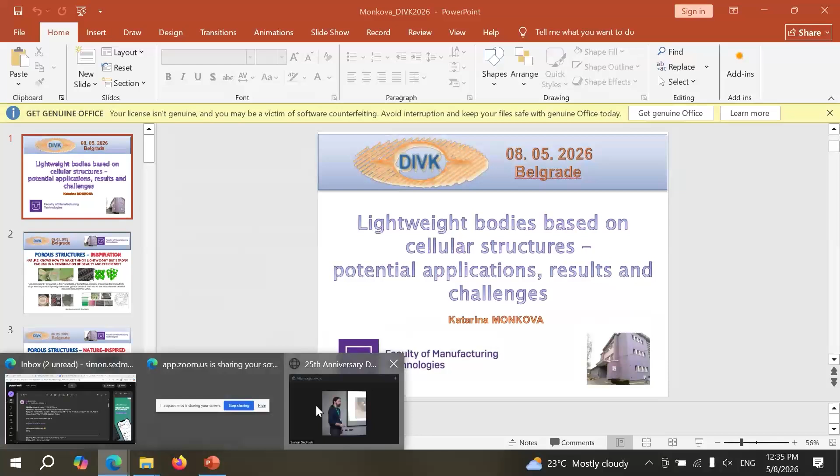Thank you very much. During the preparation, I would like to thank Professor Sedmak for his invitation, which I accepted really with great pleasure, because after a few months I can be here again. Pleasure is ours, yes, and to meet friends and present our results.

To be honest, when we spoke about the topic of presentation, I didn't know about previous presentations given by colleagues from Debrecen, so this is a little bit similar. Let me introduce our long time faculty results and research, what we are doing and now offering, cooperation not only with Belgrade, but maybe also with Hungarian people. Thank you very much, Simon.

Let me introduce myself a little bit. I am from Slovakia, from the Technical University of Košice, but one of the faculties of Technical University is in Prešov. It's situated in Prešov. They are really close cities, about 30 kilometers today by highway, so it's no problem to get there. Košice is the second biggest city in Slovakia, and Prešov is the third biggest city in Slovakia.

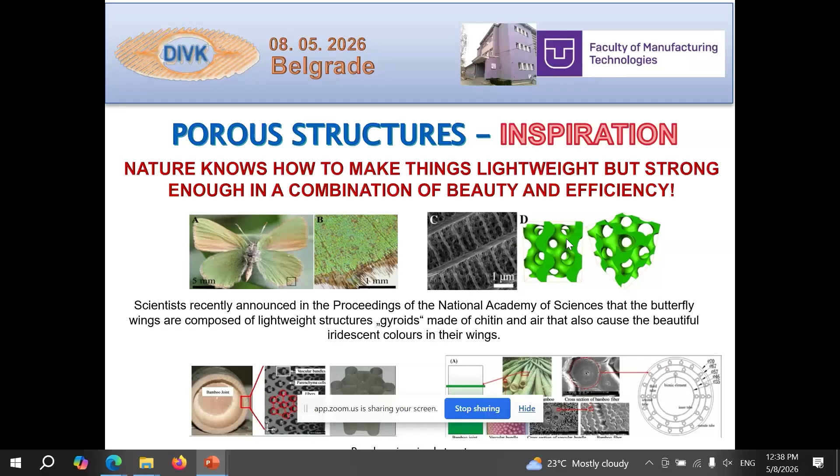We can see the beauty of nature around us. When we stay there, it's really beautiful to be there. But if you look at it like scientists or technicians, you could see how efficient nature is. Nothing is totally solid. Even our bodies, plants, animals have cellular structures that are really efficiently built to help not only with beauty, light reflection, or sound absorption, but also with mechanical properties, so efficient. So this is inspiration that came many, many years ago to us.

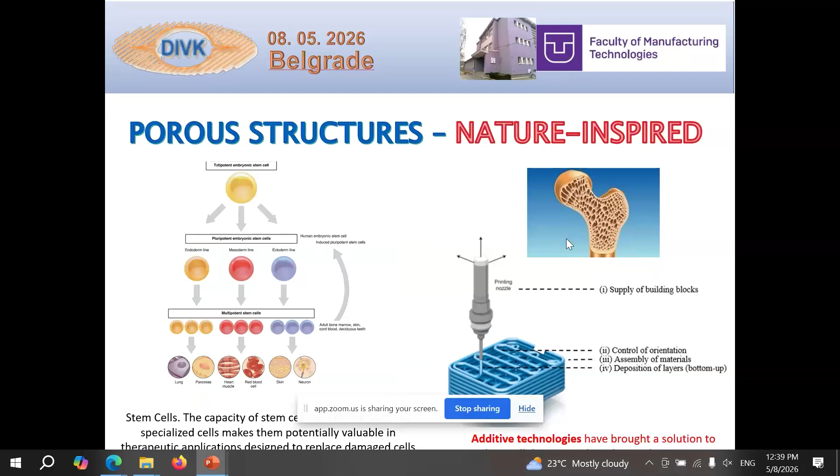And of course, additive manufacturing enabled these possibilities, because complex structures couldn't be produced very easily by conventional technologies. So this inspiration from nature could become reality thanks to additive manufacturing. Of course, these cellular structures are everywhere, as I mentioned, in our bodies, and additive technologies, as already mentioned, could be implemented also in hip prostheses and so on.

Some implants not only for teeth, but for other properties that could be much better treated after some injuries and so on. So additive technologies can help humans in this way from the healthcare point of view.

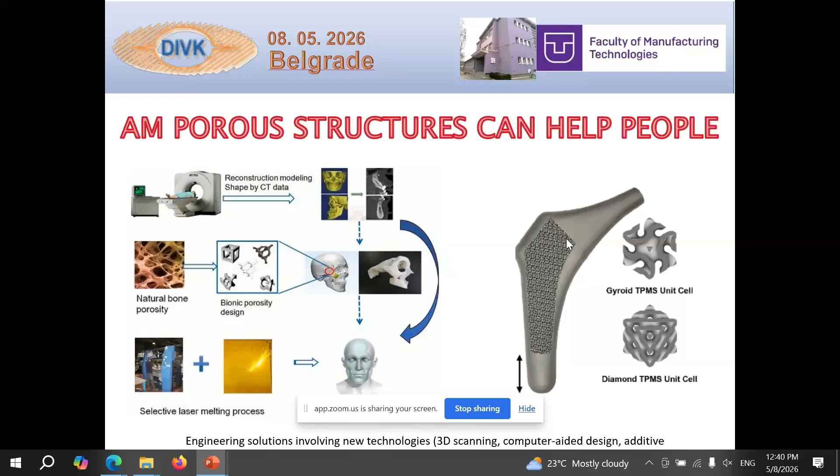Of course, if we have some lightweight structures, it can help. It can be implemented in many devices that are very heavy, for example for older people. So we can make them lighter to be more movable for older people who are not as strong as young people, and so on.

And if we look from a technical point of view, lightweighting can be very useful not only for the automotive industry, but also aerospace and aircraft industry, because some studies found out that 1 kilogram of saving on a 73-ton aircraft can save about, I don't know, 17,000 dollars per year. Fifty kilograms, for example, for long trip air flights can be even up to 1 million euros. That's one plane.

How many planes do you have around? And this saving can help in a secondary way too, because it's not only saving material, it's saving fuel, and saving fuel means that we can save our environment, reduce pollution, and so on.

Using this lightweight approach, we started to use plastic because of its light properties. My mom used to carry heavy milk or glass bottles daily, 2 liters of milk by hand, and so on. After that, we used plastic bottles, not as heavy as glass ones, and we started using plastic in huge amounts everywhere. So what should we do with this plastic now?

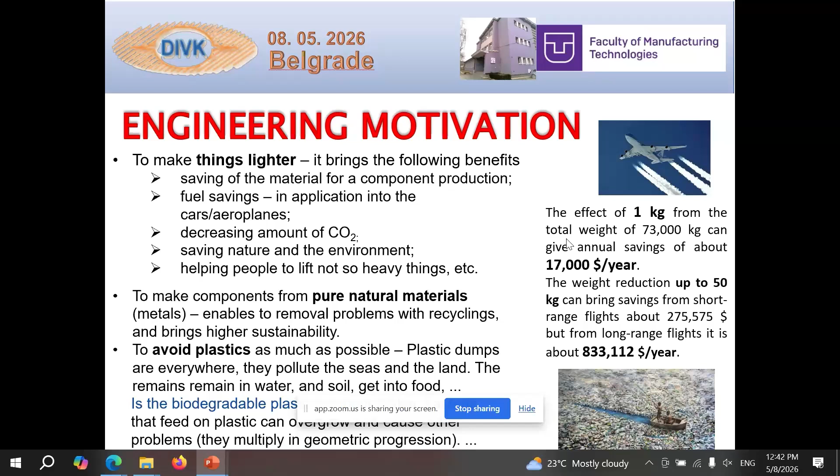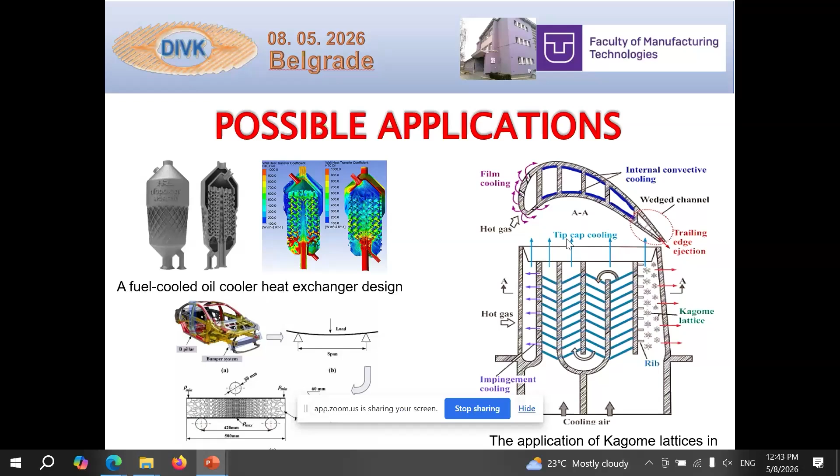So if it is so, we can maybe be part of some improvements in the next generation's life. Of course, the next applications could be heat exchangers, complex parts of wings or turbines, some crash energy absorption parts of cars, and so on. This is the idea that we started to work on, because we developed cooperation from our faculty with many universities and other organizations through Europe at this moment.

Hopefully we will go further, and of course Belgrade is great potential help that could be.

We have already started cooperation with Croatia. Last time we were also in Maribor with Professor Gubeljak and others.

We are now open for development on these challenges, as mentioned in previous conferences, because we went through many problems. We started with the cheapest available technologies, maybe 20 or 15 years ago, with 3D printing of basic lattice structures.

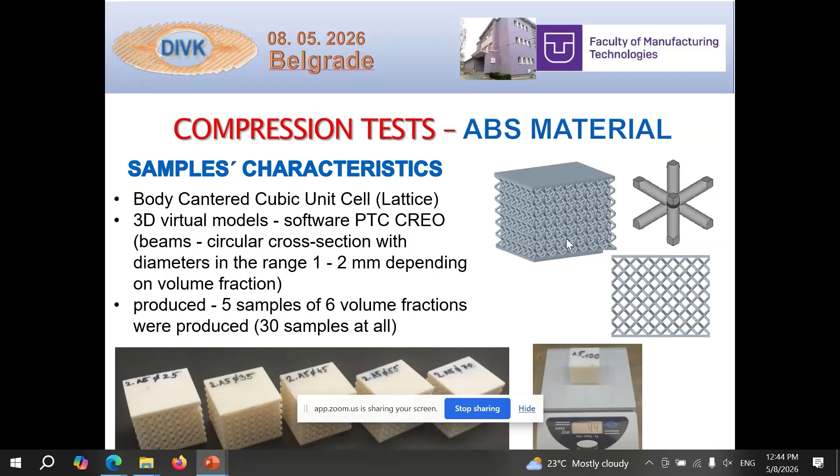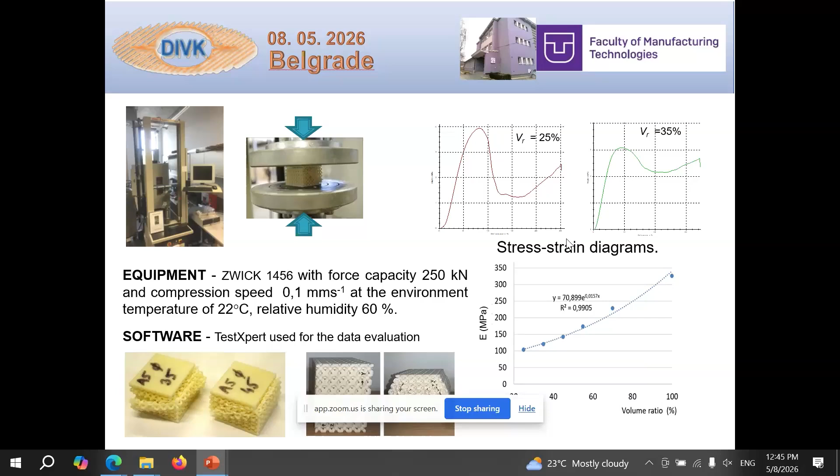We used body-centered cubic lattice structures and observed their behavior. We identified that previously set-up numerical analysis did not correlate well with this type of body. We also saw that damage and fracture could occur diagonally, or in a concentric way depending on volume fraction. This is something that should be taken into account during evaluation.

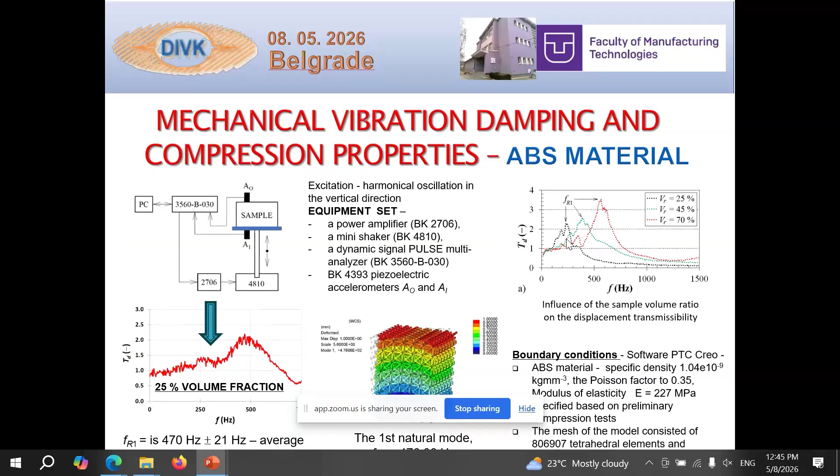After that, we went through correlation of frequency analysis and modal analysis with these basic simple structures. Last time, in Belgrade in November, we presented a joint paper based on tensile tests.

There were problems previously when we built samples: they fractured where the structure connects with the parts used for tensile testing. We solved it by strengthening these surrounding parts a little, and after that the cracks were much better positioned inside the samples. So the results gave us the mechanical properties of this structure.

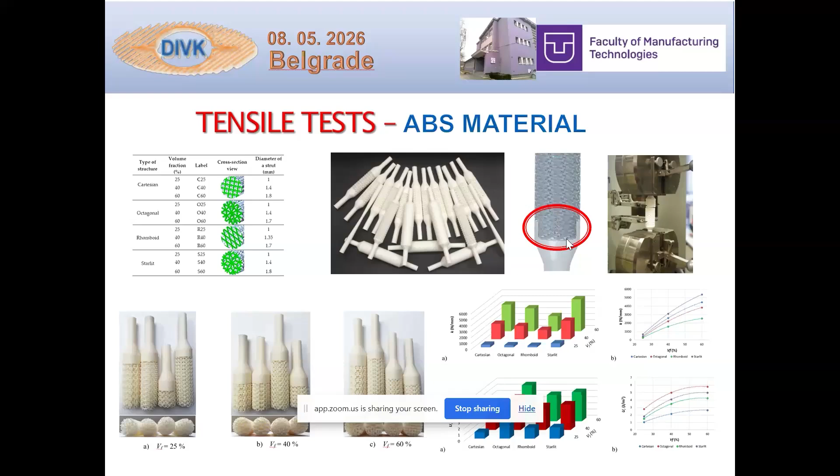We compared them with whole, solid material, and so on. We also went through bending tests.

We first produced these structures and found that technology is very important, because a pure tube had much better bending properties than one strengthened with this lattice structure. This was because of problems with the technology of nozzle movement and printing strategy.

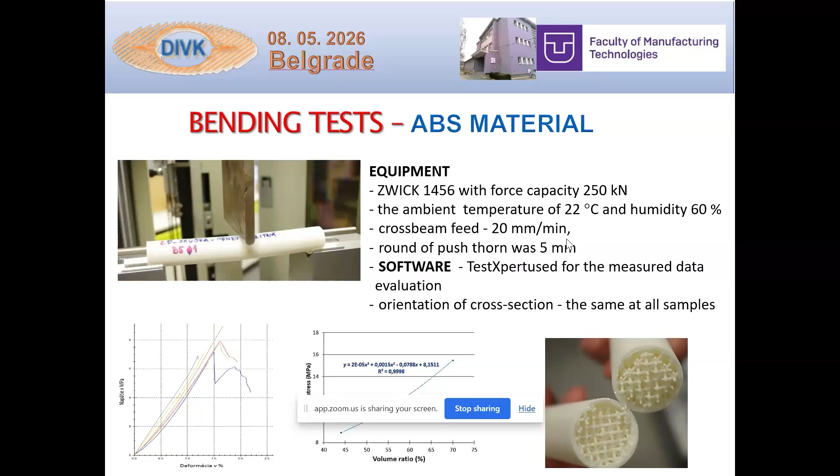So technology plays a big role in mechanical properties, along with materials and topology, but firstly the technology issue needs to be solved—not only for mechanical properties, but other properties as well.

We also completed a comparative study of different structure types with sound absorption properties, which can be used for many applications—from buildings to walls next to roads and highways, to insulation between spaces, or for absorption and reflection properties in operas, theaters, and so on.

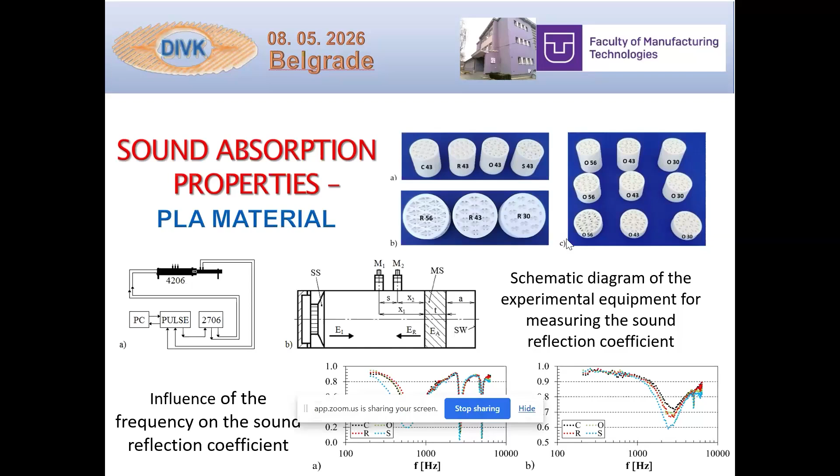This comparative study continues now. Our article is currently under publication, continuing with other types of topologies, trying to find how barriers and the height of the structure affect sound absorption results.

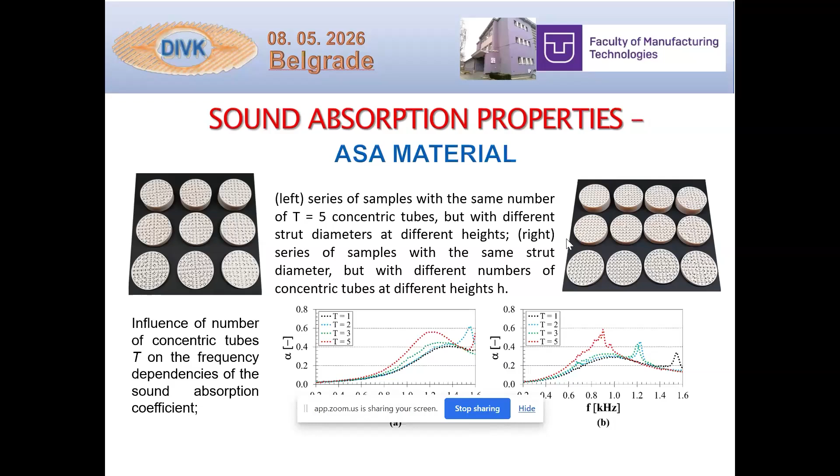After seeing this technology and the problem with sharp corners mentioned in the previous presentation, we found a type of complex structure called triply periodic minimal surfaces. They are smoothly designed, not like lattices with sharp corners.

We tried to use this. The main advantage of these structures is that they are self-supported, so they can be placed inside solids without needing a support structure during building.

We started with carbon fiber reinforced nylon material, and you can see it here, though maybe not very well visible.

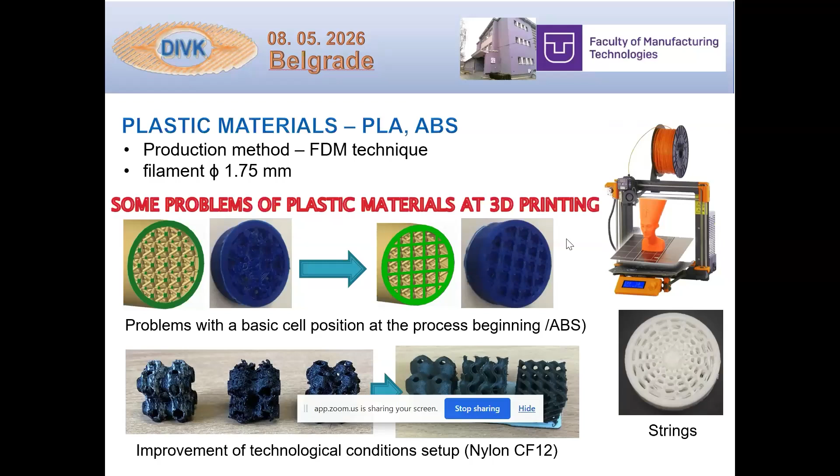Technology again played a big role. We improved from our first attempt to a much better attempt with a PhD student, producing a nicely printed structure called the gyroid. You may have already heard of it, but even better properties were seen in many other tests and experiments with the so-called diamond structure.

I'll show you the basic cell a bit later. We went through bending tests in a comparative study, and you can see that in all cases the diamond structure had the best properties.

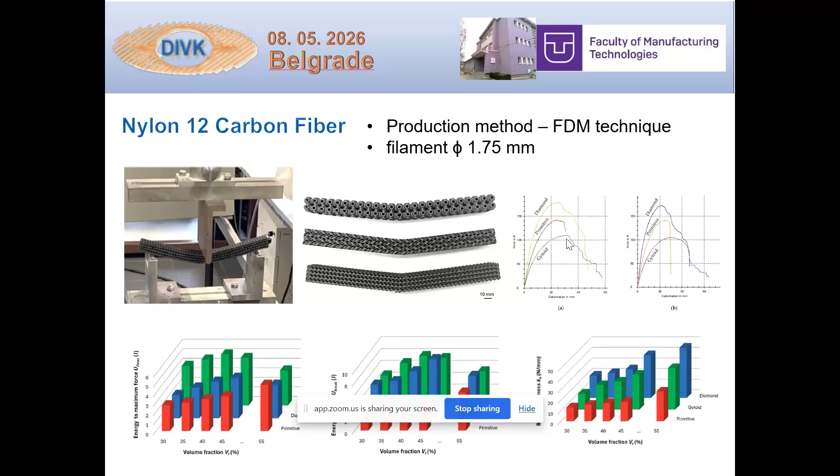Okay. We continued this project, and we had the opportunity to have production of inconel material or metal materials. We selected inconel as one of the best. Thank you. Bye. Have a nice trip. Okay.

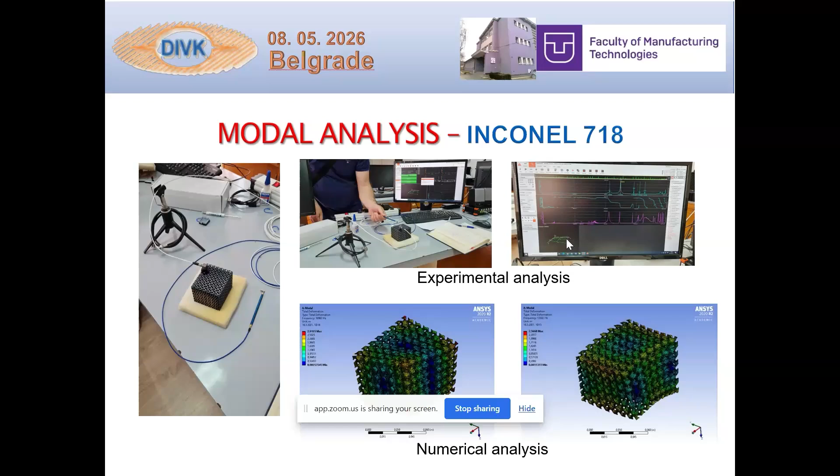We selected Inconel as a potential material for 3D printing. Modal analysis properties were also correlated with numerical analysis, and compression and tensile tests were again selected for evaluating properties.

We tried to combine the two most famous cell types—the triply periodic minimal surfaces, gyroid and diamond—to find what matters most: wall thickness or volume fraction.

We can advise that the thickness of the wall is much more important. It should be evaluated based on that, because at the same volume fraction, wall thickness plays a major role.

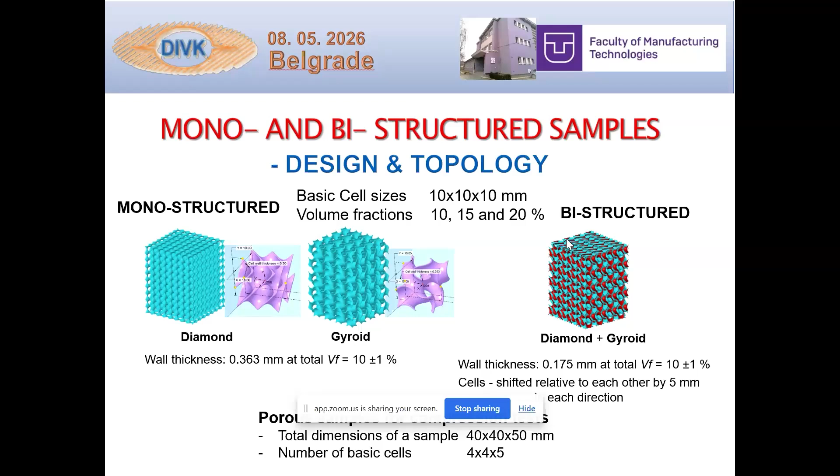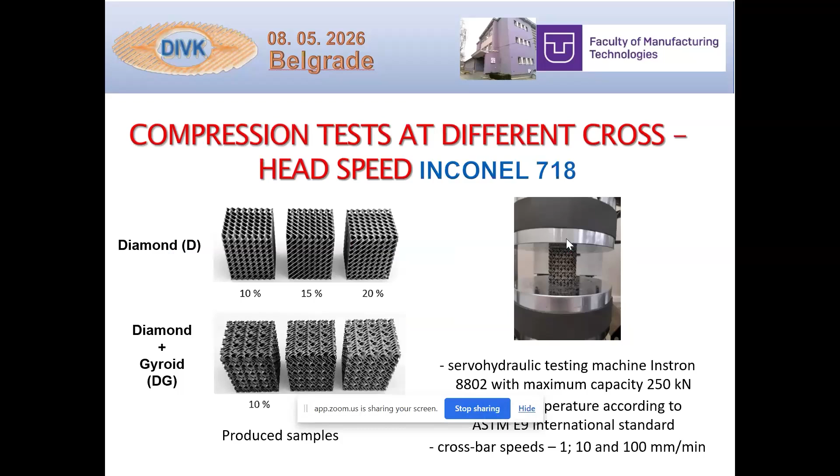So this is a combination of two structures inside one model. And with inconel, we continue with smaller sampling compression tests. Still, diamond had the best properties and structure. There are many other different structures.

We also used Neovius, which is evaluated as the structure closest to the bone cells inside the bones. So we tried to do that.

And now we are trying to run numerical analysis. It's not easy, because it's created within the software like a surface, not solid. So it's necessary. It's not a problem to have STL for production, but for meshing and elements it's a challenge for us now, so that the results of numerical analysis could be correlated with experimental analysis.

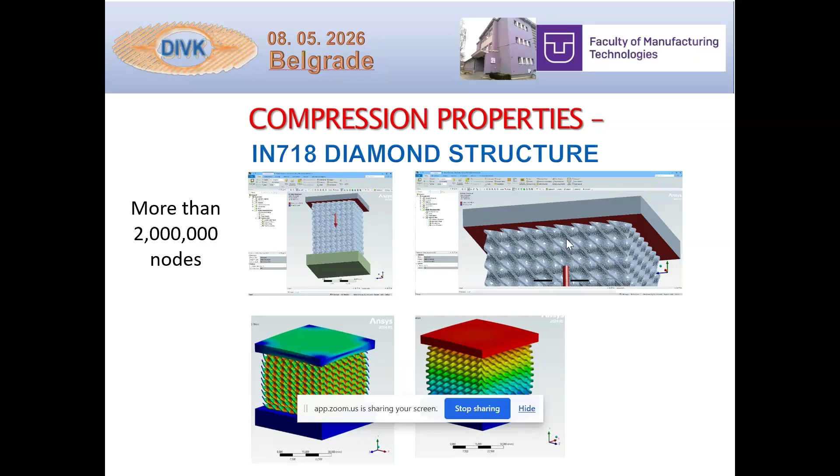So hopefully we've solved this problem for meshing now and we're trying to find the best boundary conditions to correlate all the results. And after everything with inconel, we went through aluminum alloy because of its application in the aerospace and aviation industry.

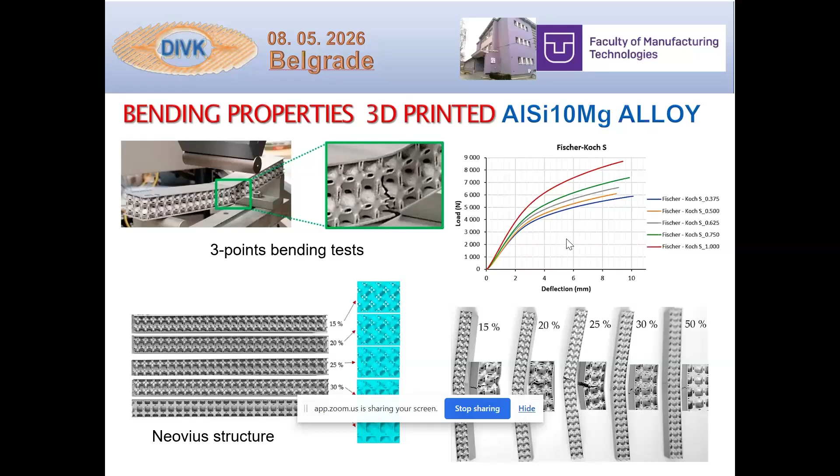There is a very popular material for that. So this is also a Neovius structure for bending tests with compression test, where we compare how it's influenced by compression rate. If there is any influence visible - it doesn't, this hypothesis was not confirmed. There is a very small difference between the three tested rates.

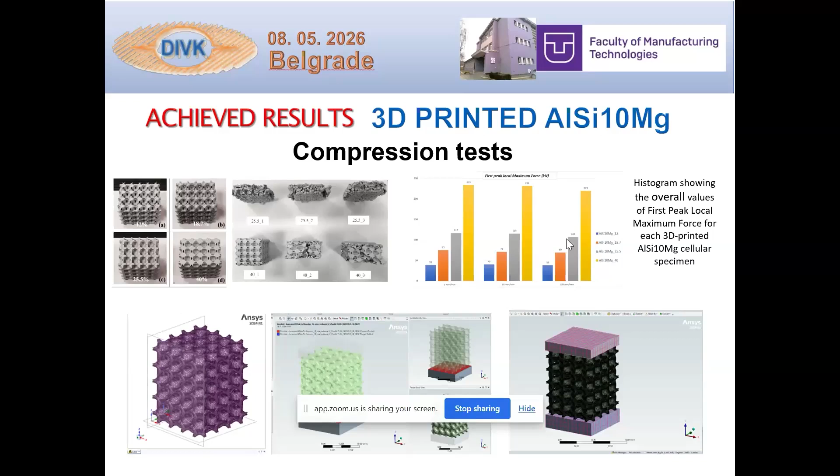It's not just about static tests, but fatigue is really very important for applications. And this is from stainless steel, produced diamond type structures that you can see in preliminary static tests, and you can see how big a deflection this type of structure can have, because they can adapt.

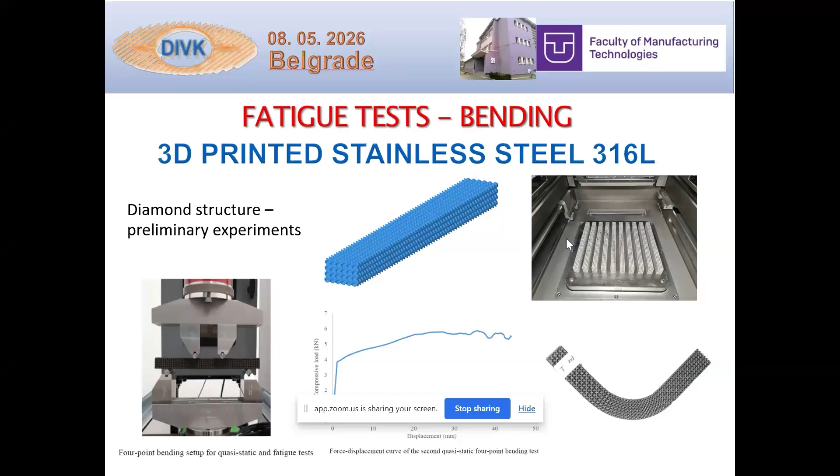This application is for pure nickel. Why pure nickel? Because we evaluated its potential application for catalytic use inside cars. So we work on pure nickel, maybe later also, because catalytics use covering with some metals that are valuable, but a different word is used for that.

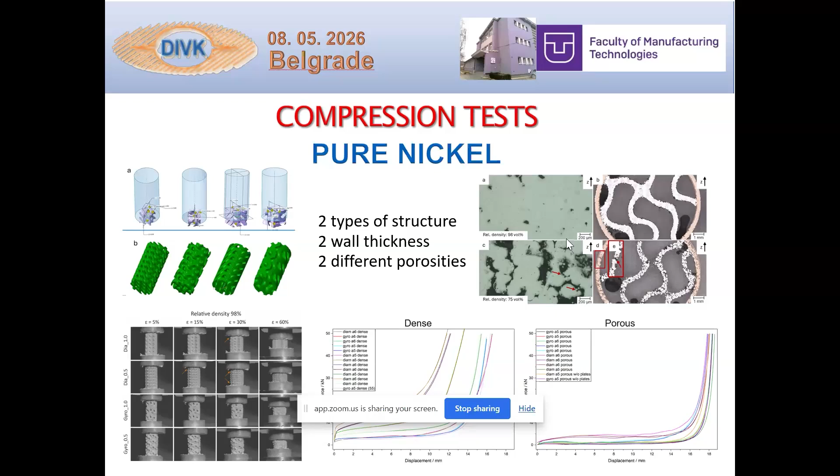And we use differently printed porosity of this structure. So not only porosity because of the structure itself, but also porosity inside the material. And this application is intended to be applied inside catalytic converters and catalyzers of other devices.

And then this idea is about how big a difference there is regarding the skin versus the structure, because skin is usually used to connect. Most samples are not just based on structures alone; they need some skin to connect components to each other in many applications. So how big an effect does a different type of strut inside the structure have, in combination with skin around the structure.

So that we could implement the structures inside complex types of components, in wings of planes, in turbines that are not symmetrically designed, because in numerical analysis we can many times use symmetric constraints. But in such complex components, we cannot use that, and so we need to apply the whole component and numerically and experimentally test the components.

Of course, the last step is optimization of the structure. We can make the most important part where there is stress concentration with a dense structure. After that, other parts of the same component can be made with lighter structures, and so on. There are challenges in that we can exchange slowly or smoothly from one structure to another if necessary. So there are challenges in optimization.